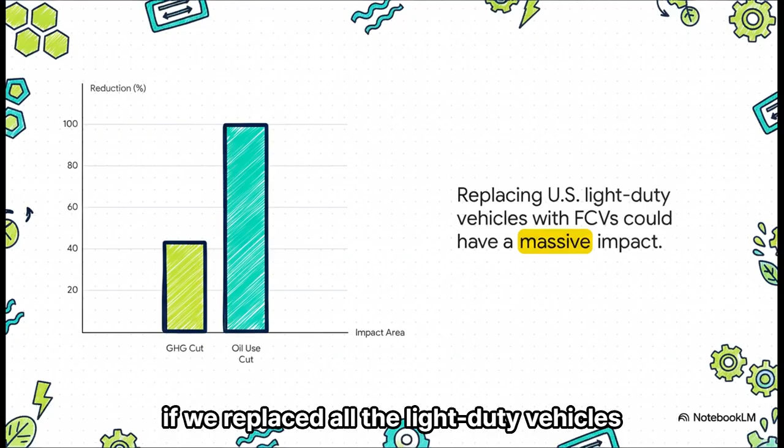And one of the most exciting options out there are fuel cell vehicles, or FCVs. The amazing thing about them is that unlike the cars we're used to, their only byproducts are heat and plain old water. It's an incredibly clean way to drive. And the potential impact here isn't just a small tweak. It's huge. One study figured out that if we replaced all the light-duty vehicles in the US with FCVs, we could slash greenhouse gas emissions by 44% and basically eliminate our need for oil for those cars. That is a total game changer.

So how do these super clean engines actually work? To really get this breakthrough, we've got to pop the hood of an FCV and take a look at its heart, the fuel cell itself. Okay, we're talking about a specific type here called a proton exchange membrane fuel cell. Let's just call it a PEM fuel cell. They are perfect for cars because they run at pretty low temperatures, they start up quick, they're small, they're light, and they're super efficient. But there's always a but. They've had challenges with cost and performance.

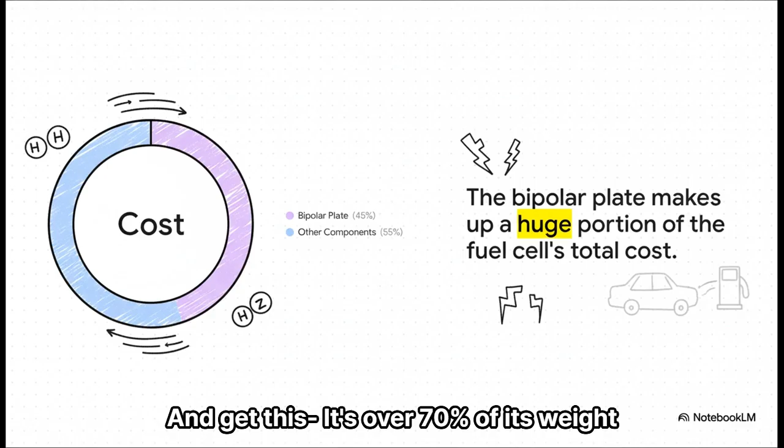And when you dig into that cost and performance puzzle, you find one component right at the center of it all, the bipolar plate. You can think of it as the backbone of the fuel cell. It handles everything from making sure electricity flows to delivering the fuel. Now this is where it gets kind of wild. This single part, the bipolar plate, can make up nearly half the cost of the entire fuel cell. And get this, it's over 70% of its weight. So it's pretty clear, right? If you can make this one part better, cheaper, and lighter, you change everything.

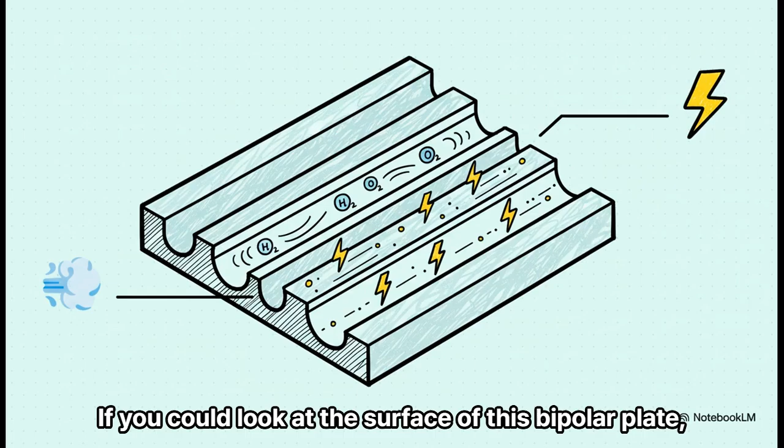Okay, so we found our target, the single most important component. Now let's zoom in even closer on the very specific engineering puzzle that these researchers were trying to crack. If you could look at the surface of this bipolar plate, you'd see these tiny little grooves. There's the open part, called the channel, that acts like a tiny highway for the hydrogen and oxygen. And then there's the solid part, the rib, that actually conducts the electricity that the fuel cell is creating.

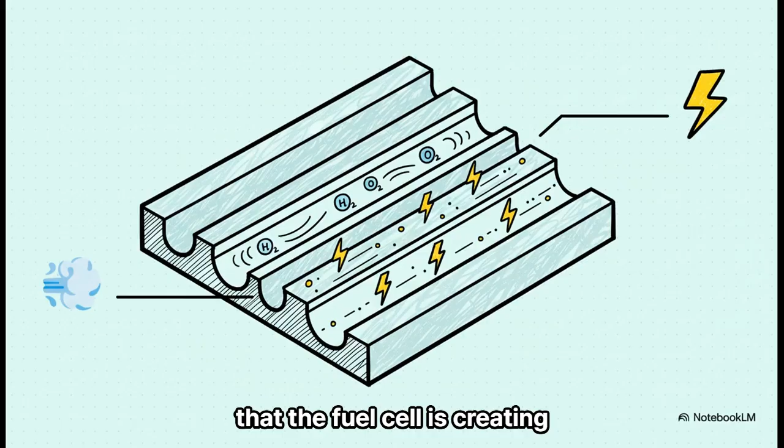So here's the billion-dollar question. What's the absolute perfect balance between that solid rib and that open channel? This relationship is what they call the rib-to-channel ratio. You see, if you make the channel too wide, you might not get good electrical conduction. But if you make the rib too wide, you could end up starving the fuel cell of gas.

Now, to solve this puzzle, the researchers didn't just take a guess. Nope. They ran incredibly detailed computer simulations on 16 different designs, carefully tweaking that rib-to-channel ratio from one extreme to the other, just to see what would happen. And this is where it gets really, really cool. Through all of that meticulous testing, they weren't just looking for a pretty good design. They were hunting for the perfect one, the just right Goldilocks ratio.

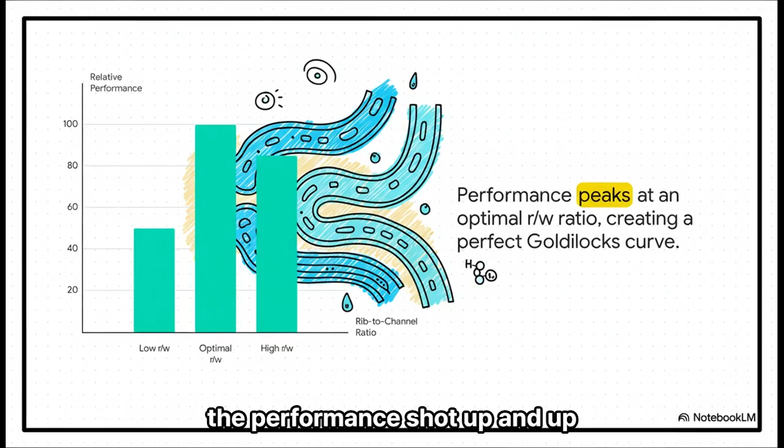All right, the moment of truth. After simulating all 16 of those different versions, what did they find? Which one delivered the most power? The result couldn't have been clearer. You could literally see it in the data. When the ratio was too low, performance was meh. As they increased it, the performance shot up and up until it hit a perfect peak. And then, as they kept increasing it, the performance started to drop right back off again. It was a perfect Goldilocks curve.

And that peak performance, it wasn't just a little bump. At that sweet spot, the fuel cell kicked out a staggering 57.3% more power compared to the worst design. That is a massive leap forward from just a simple change in geometry.

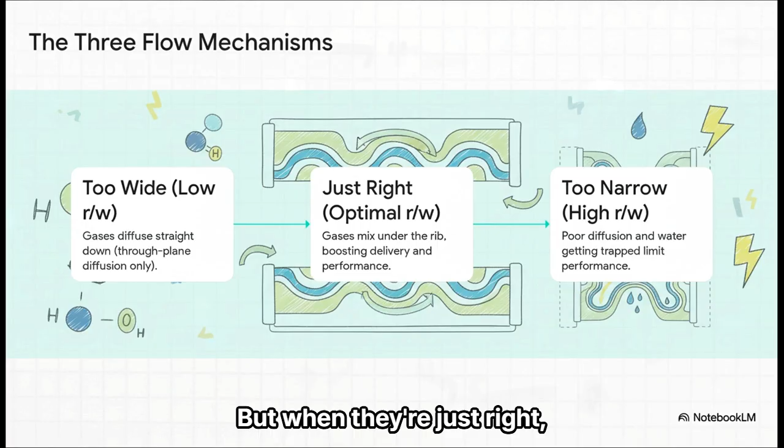But why? Why does this happen? Well, it all comes down to traffic flow for the gas. When the channels are too wide, the gas just goes straight down. But when they're just right, something magical happens. The gas not only flows down, but it also mixes sideways under the rib, feeding the whole system way more effectively. And if you make the channels too narrow, you get a traffic jam. The fuel can't get in, and the water that's created can't get out.

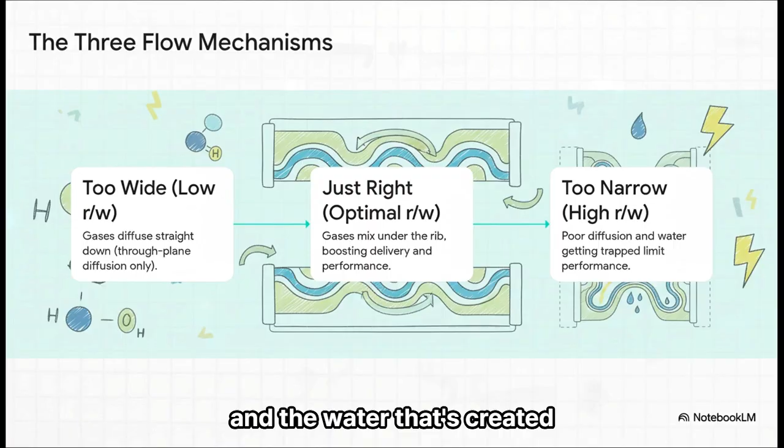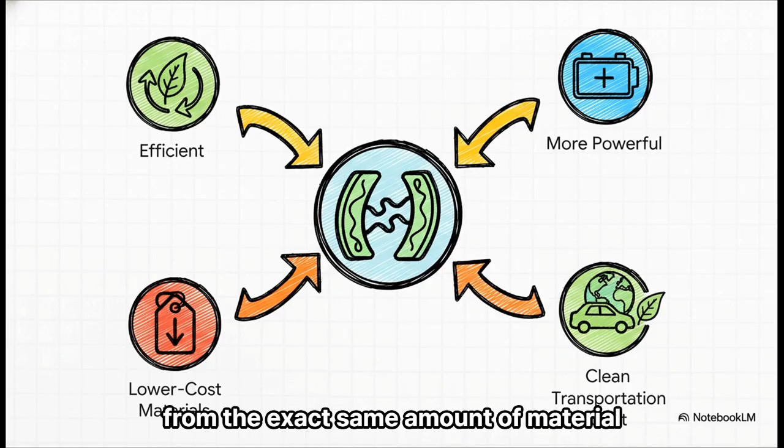Okay, so we've been deep in the weeds of engineering here. A tiny ratio makes a fuel cell way more powerful. But let's pull all the way back out. What does this discovery actually mean for the real world, for us? It's like a domino effect of good news. This one little optimization means you get more power from the exact same amount of material. That means higher efficiency and less wasted fuel. It even means you can start using newer, cheaper materials for these plates.

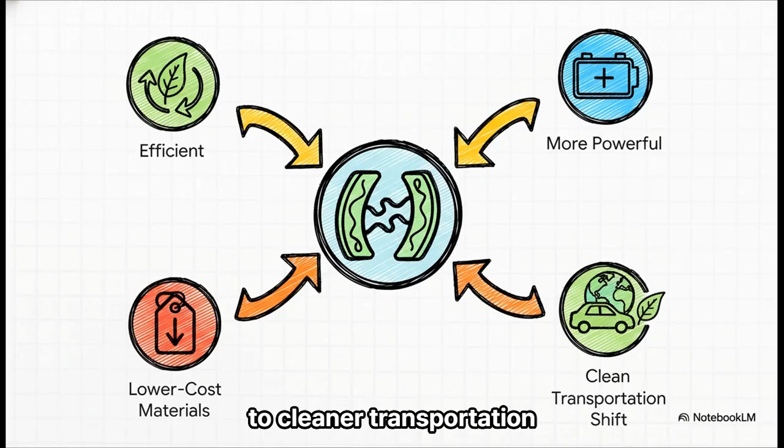And all of that together, it makes fuel cell vehicles cheaper and better, which helps speed up the entire shift to cleaner transportation. And it really just makes you think, doesn't it? This huge leap forward didn't come from some brand new miracle material. It came from obsessively perfecting one tiny little measurement. It leaves you with this really fascinating thought. How many other massive breakthroughs are just hiding in plain sight, waiting for us to pay attention to the small stuff? Thanks for digging into this with us.